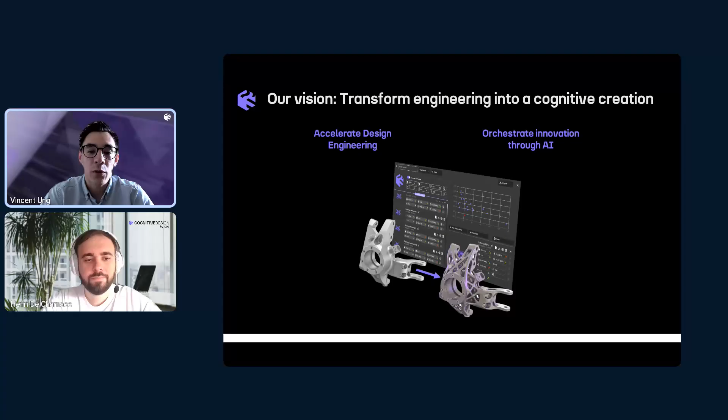When we look at the traditional engineering process, we go from manual concept creation to different stages such as simulation, manufacturability, business feasibility, to have actually an end product that is manufacturable. And we find that very often this process can be iterative, where simulation goes back to CAD, to manufacturability study, and so forth. And when you work with large companies, typically you have also technological silos, and this makes the process not so agile.

So the idea behind CDS is to really shrink this product development, make it a lot more efficient, introducing automatization and different sets of algorithms that will help you design and explore design more effectively. So instead of doing that manually, we have a different set of optimization tools that will help explore variants of design. And so you can make trade-offs and find the best solution for your needs.

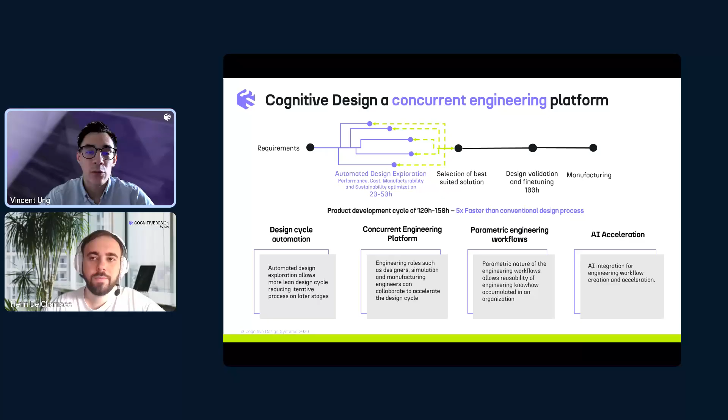So the idea is to reduce the product development cycle up to 5 times compared to conventional CAD design tools. And a lot of it has to do with the automatization that we'll go through together. And also the different tools that we have developed that we'll see in the demo, such as generative design, parametric design, optimizations, and also workflows that help us create streams of design changes that can be replayed anytime. And on top of that, we have developed AI capabilities to automate even more these design phases. Let's dive into our key technological enablers with Henri.

Yes, so there are 3 pillars that support the platform. The first one being implicit modeling. So we have our own geometrical engine that was developed at CDS. That is a hybrid modeling engine combining the power of implicit with the reliability of CAD and meshes. So a lot of our operations are based on this, and this allows to have a really robust automation.

Second one is parametric design. So you will see after, because it's a computational design platform with blocks that you connect, every workflow that you will make will be reusable. So it's really interesting. If you want to make a variation of a part, you don't have to redo everything from scratch. You can just change some parameters, redo it again. And it's also usable for other parts too. Like if you have similar use cases, you can just keep your workflows that you took in one project, reuse it after. So really handy.

And the third one is the AI-driven analytics. So we have a lot of tools to do analysis. So you can characterize your design, calculate some KPIs to have the performance, the cost, carbon footprint, and the manufacturability. So every design that you will make, you will see after, will have a scorecard with all of these scores.

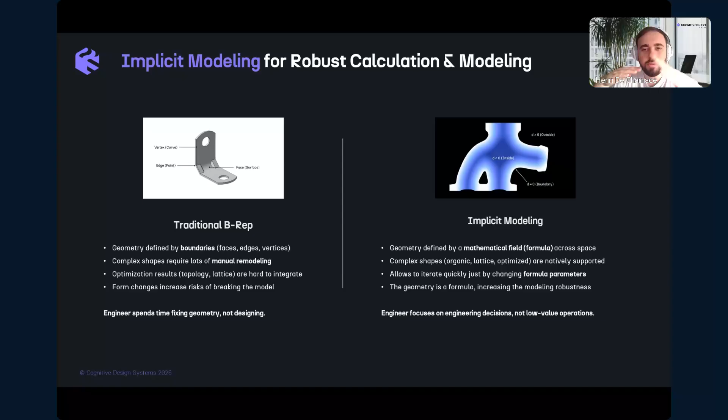On the contrary, implicit modeling, it's the full volume that you track. So it allows the operation to be really robust. You won't really have any problems. For example, if you put a fillet, if it goes a bit too far, usually you would have some topology errors on CAD. But here we don't have them. So it's really good for automation.

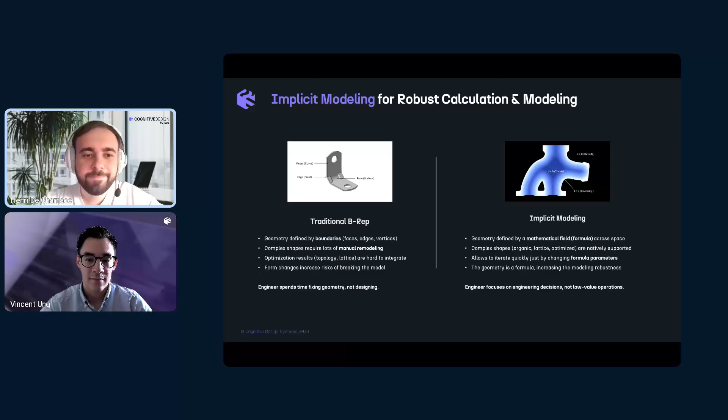Should we dive into seeing that in real? Yeah, sure. I will share my screen. Okay. All right. So yeah, before we deep dive into the whole demo, I will just show you how the platform operates. It's really simple, actually.

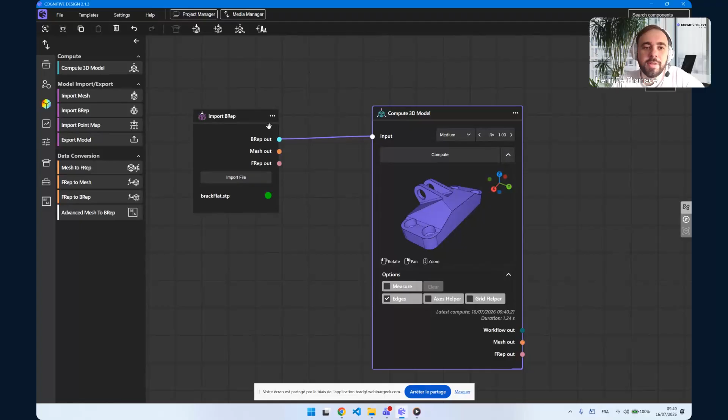So you have these blocks that you can connect together like this. And you put your requirements to do some operations. So here, for example, let me just import a simple bracket, like this one. I can just click compute here, and I can have a visualization of my bracket. So here you can see it's a CAD model. And for example, if I want to make it lighter for additive manufacturing and add lattices inside, I can just use here that lightweighting block.

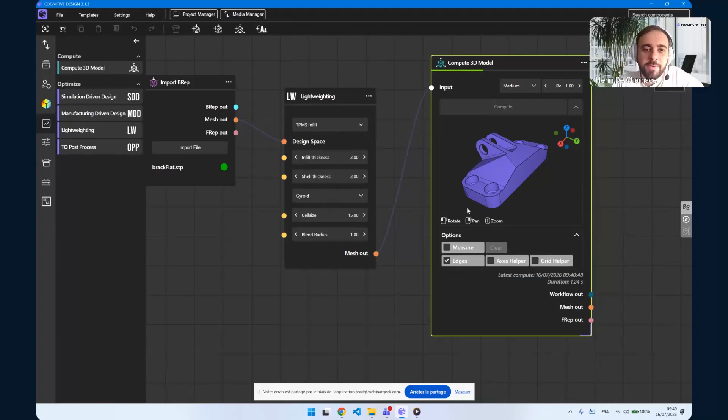So I connect my part to the lightweighting block, I connect it to the compute block, and then I can just run the calculation. And here, these are the requirements that I can put. So by default, for example, it's using surface lattices. So you will see them here, what is calculated. And I have a thickness of 2 millimeters. The shell also has a thickness of 2 millimeters. Here, you can see if I cut the part, you can see these lattices inside.

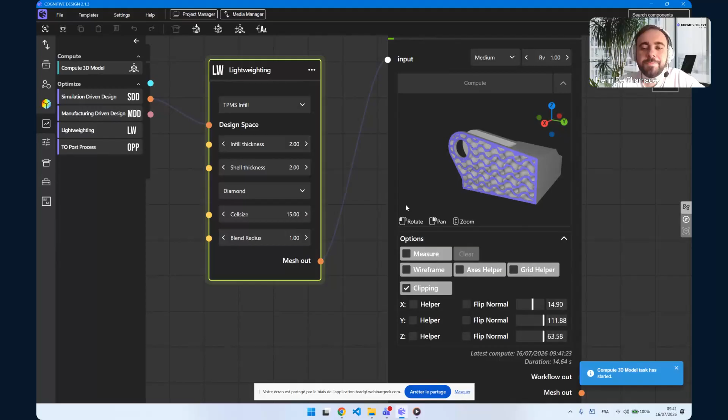And I can just change these requirements to have a different variation. So for example, if I wanted a different pattern of lattices, I can just switch it here, then recompute. And then my geometry will update, and I will have the new model with the other lattices inside. So fairly easy, and a lot of the operations that we have are kind of monolithic like this. So you have a single block that you can use and put all of your requirements inside in order to optimize your part. So here you see you have a different pattern.

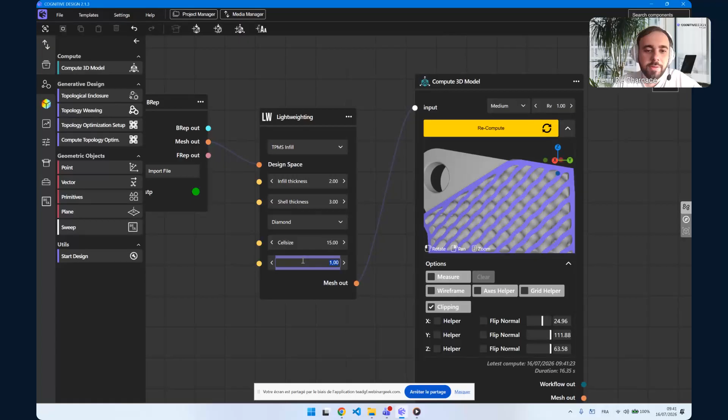I can also, for example, make the shell a little bit bigger. So the shell will be that thickness here. I can also put, for example, some radius between the lattices and the shell.

And just run it again. Fairly easy. And if I have a different part, I can just use that same workflow. I just need to change the input here and run the calculation again.

So quite straightforward. Here you can see my shell is a little bit bigger, and I have a radius here. This is thanks to implicit modeling, actually, because it's fairly hard to do in CAD. At the intersection of the lattices and the shell, you can see that we can put some radius automatically, which is really nice if you are into 3D printing, because it removes the risk of having cracks, for example.

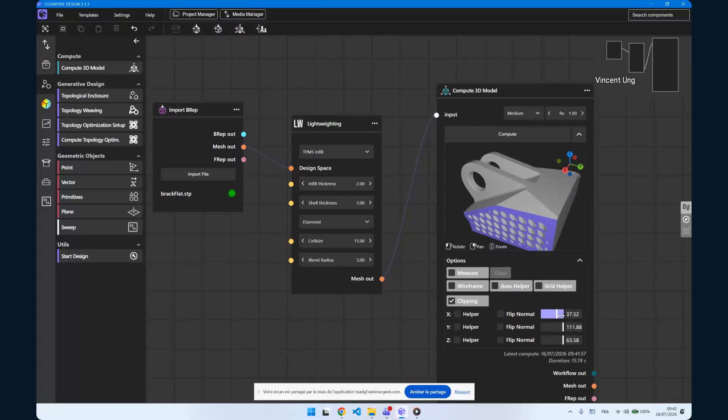Yeah, so quick intro on cognitive design. I will let Vincent finish the presentation, and then we can go back to show you more advanced workflows. Sure, let's do that.

All right, back to the presentation. So CDS and cognitive design is not just a software for lattices or implicit modeling. It goes even more than that. So what we will see together is the generative design capabilities.

And we often use that to perform design generation, where we'll create different variants so we can compare them. So instead of generating or drawing manually one design, we'll maybe generate 50 and see those trade-offs. And so to compare that, we need a tool.

It's something that we call design exploration, which is a multidisciplinary exploration that helps us compare designs between them. For example, is this one heavier than this one? Is this one more stiff in terms of stress? Is this one more manufacturable? Is this one more costly? You see all those KPIs as part of the design exploration, which helps you track the differences and the variants.

And at the end, the workflow automation helps you trigger those combinations of generative design exploration to go even faster. So really, the idea is to capture the design intent, as Henri mentioned, to really automate what you want to do when you optimize a design for different purposes.

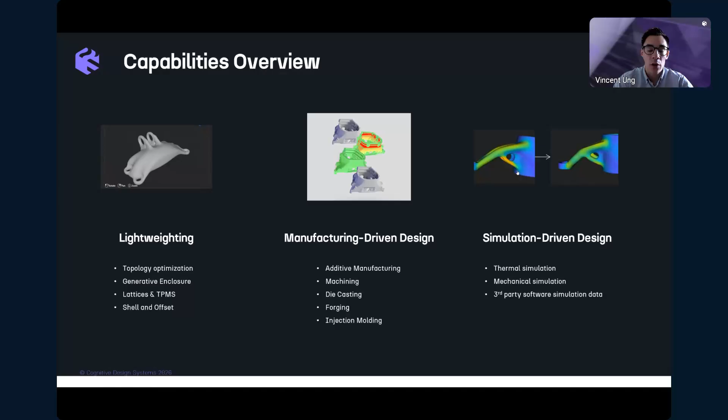What we have seen together is capabilities such as lightweighting. For example, if you focus on additive manufacturing, you can easily put lattice or TPMS, but you have all those other strategies such as topology optimization. We have also developed our own algorithms such as topology weaving that helps you lighten a part.

But we also have different capabilities that are more on the manufacturing aspect. So the second one is called manufacturing-driven design. It's a block that helps you improve your part for different manufacturing methods. We cover 5 different methods today: additive manufacturing, machining, die casting, forging, and injection molding. And the software will help you implement design-for-manufacturing rules automatically. We will see that together in the demo.

And last but not least, we have also a meshless solver. So we perform simulation-driven design that combines with implicit design. The beauty of that is that you can use the result of a traditional FE analysis or a solver to drive the modification of your parts. Typically, in this example, you can thicken locally the part based on the stress that you have obtained. And today we cover 3 types of simulation: thermal, mechanical, obviously, and thermomechanical, which is the combination of the two.

We can also accept third-party simulation data. So if you use software such as ANSYS, Abaqus, or others, you can import the results back into the software to drive the geometry changes.

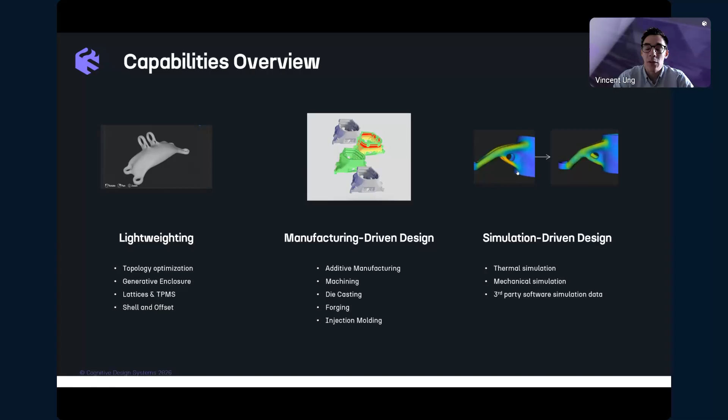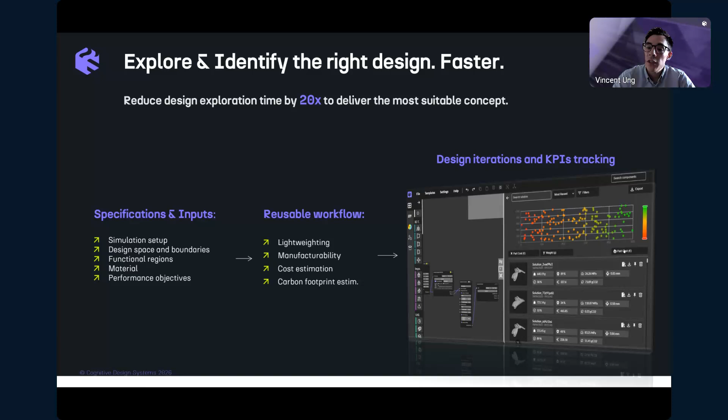Now, this is just a quick video, we will see that together. As I mentioned, we can use generative design to create a lot of different combinations, coupled with workflow to generate even more variants and structures, and compare them, apply filters, focus on parts that are above a certain manufacturability score, or compare a certain KPI such as the cost, the displacements, the weights, and so on.

And we'll see how we use that to perform engineering projects. Typically, when you want to do a new concept, sometimes you're not sure about the material, so you can play on different materials, on different manufacturing methods, for example, 3D printing versus conventional manufacturing, and so forth and so on.

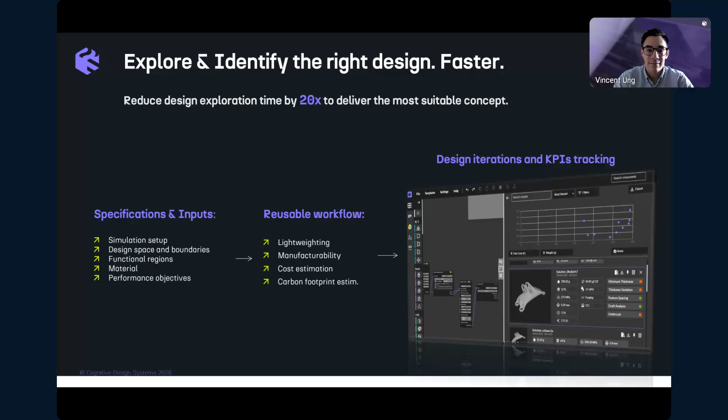I'll give it back to you, Henri, for the live demo. Yes. All right.

Okay, so let's go back to cognitive design. So I will show you how it typically goes if you want to optimize parts, especially to do topology optimization. So of course you can start from scratch and put the blocks yourself, but I would say 80% of our users just use the templates that we have here.

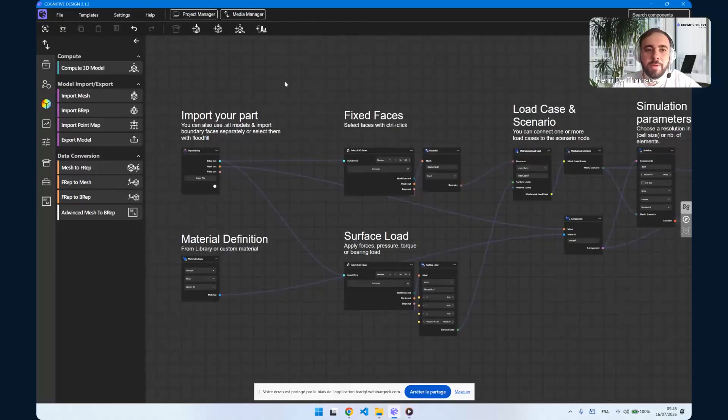So for example, we have this really handy one, which is called single body topology optimization. And you have everything that is already connected to do both topology optimization, manufacturing-driven design, and also track everything with the design exploration tool. So if we fly over the workflow very quick, here you have all the preparation steps where you can import your parts, select your material here, aluminum.

Here you have your surface selection blocks in order to put some load cases on your part. So we will see just after that we are able to fix some zones, apply some forces on other zones, etc. Here you have all the simulation setup that we don't really have to touch. It's already set, but we can change it, of course.

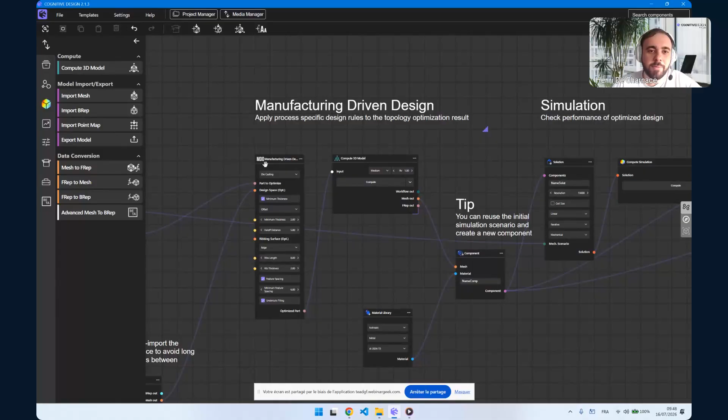Here we have the topology optimization, where we will be able to choose a target, for example, reduce 50% of weight. After this, we will have the manufacturing-driven design, where we adapt the result for the manufacturing process that we want to use. And at the end, we have some validation step where you can recalculate the performance of the part using simulation and calculate other KPIs such as cost, manufacturability, carbon footprint.

So everything that you really have to set up is the simulation setup. Other than this, it's pretty straightforward. So here, let's just keep for this part, the base setup. So I have one restraint and one surface load.

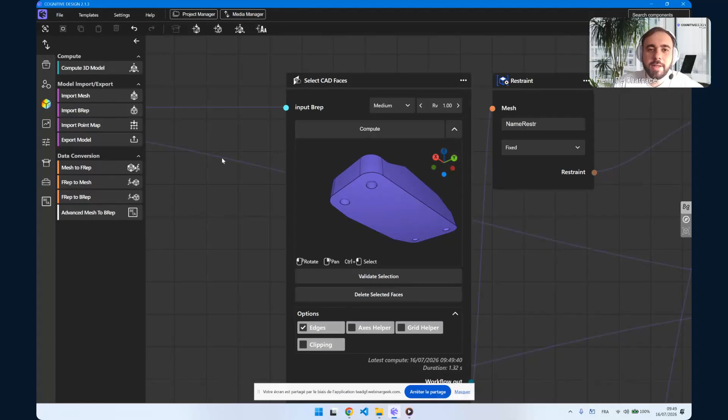So you can select directly surfaces in cognitive design using that select CAD face block. So here I can just select the faces that I want to fix. I can fix, for example, the 4 bottom holes like this. On the bottom here, I will select the faces where I want to put a load. Let's say the 2 holes on the top here.

And then, because everything is already connected, I can just run topology optimization, so I can have a first version of my part. So here I just use the base parameters. So the ones that you really want to change, I would say, would be the volume fraction and the max iteration. These are the two most important ones.

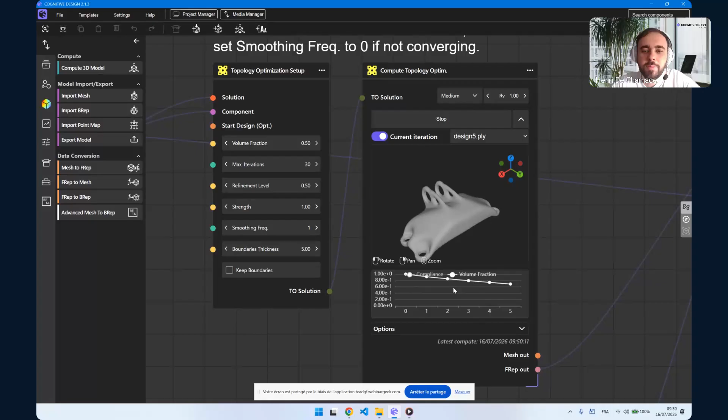This one is the target of weight that you want to have. So here we are aiming for a 50% weight reduction. Max iteration is like the maximum number of steps that you allow the optimization to do. So some people, they just put a really big number and then they stop when they feel the result is right. So you have a graph here where you can track the evolution of the weight, for example. And if you see that it becomes flat and that it's stagnating, then you can stop. But otherwise, the software will do it for you.

So here we can see little by little that it's reducing the weight of the part. So all of this is using the meshless simulation engine that we integrated. As you can see, it's quite quick. We can have in minutes a topology optimized part.

And then if you play on resolution, or if you have a really big part, like a turbojet engine, then it will maybe take 1 hour. But yeah, most of the parts, you would have them in a few minutes, 10 minutes max.

So here we can see that we are already converging to a solution. It's looking pretty good. I will just leave the calculation to run a little bit longer so it can distribute the material in a better way. You can see that it's still a bit moving the surface. So it only puts material where it's needed.

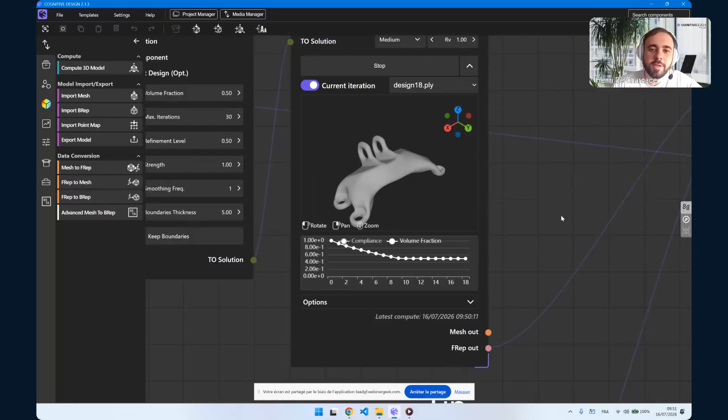So what it does in the background is it tries to aim for 50% weight reduction, but by having the highest stiffness, according to my load case. That's why here it's still changing the surface, because it can see that it can have a higher stiffness by still optimizing the geometry a little bit more.

And after this, what we can do is post-processing of that shape to make it fit to a specific process. So for example, here, right away on the right, I have it set up for die casting, but we will see together after that we can change the process and make designs fit for different processes. Let's keep die casting for now.

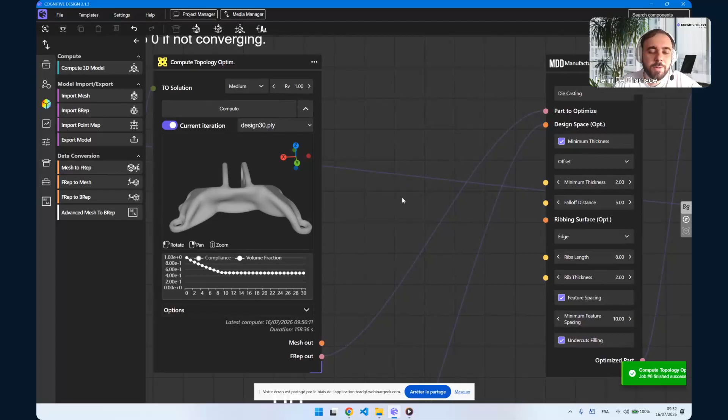So my part here, looks like the optimization is finished. So I have something like this, which is the best material reduction for that specific load case. I can see that if I wanted to make this in die casting, here I have a little bit of undercuts. So maybe we want to fix this. We can do this with that function here, manufacturing driven design.

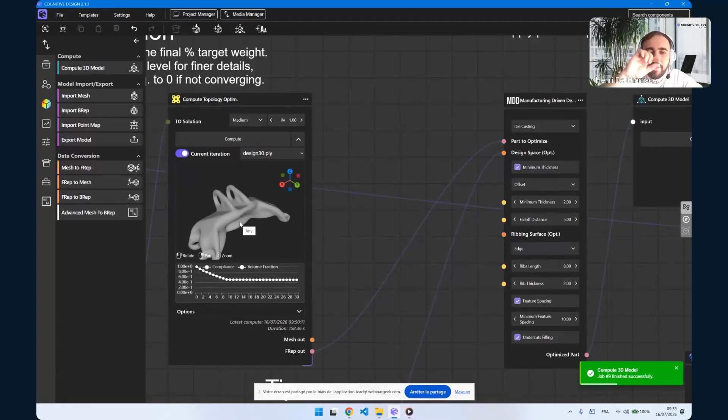So fairly easy. For each process, you have a set of rules here that are basically the design rules for that specific process. So here, for example, we have the minimum thickness, and we can set up a value here. Sometimes here it's not the case, but sometimes you can have thin sections on your optimized results.

So you can say, okay, I want everything to be above 2 millimeters, so it will do the job for me. So here you can see I've checked undercut filling. So it corrected the undercuts that I had, made a straight surface. Instead of having a concavity here, it just corrected it and made it straight.

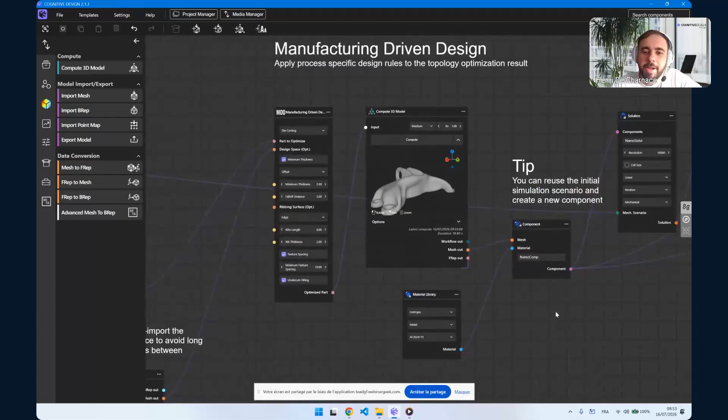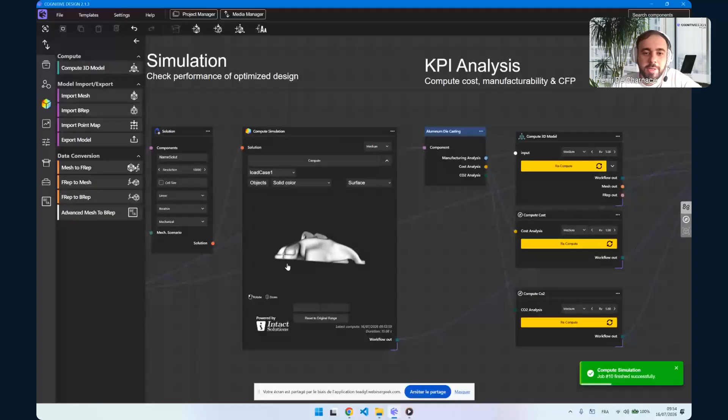And then once I'm happy with my part, I can just run the simulation to check whether I'm still meeting the requirements or not. So usually when you do a project, you have a maximum stress that is tied to the material. You maybe have a stiffness target too, some displacement value that you don't want to be above. So here, again, meshless simulation, so it's fairly quick, and I have the stress values for my part and the displacement.

Can calculate also the other KPIs. So here we have manufacturability, cost, and carbon footprint. So I just let them run.

And for manufacturability, you can optionally go have a look at how it is. So for example, here, I can see that everything is green, so the thickness of 2 millimeters that I've set is validated. Or I can look at the draft analysis, and I can see what's the core, what's the cavity, and what zones would I need to put some draft angles.

You can do it in the software. Here I didn't do it because it can take a bit long. But you basically see the idea, right?

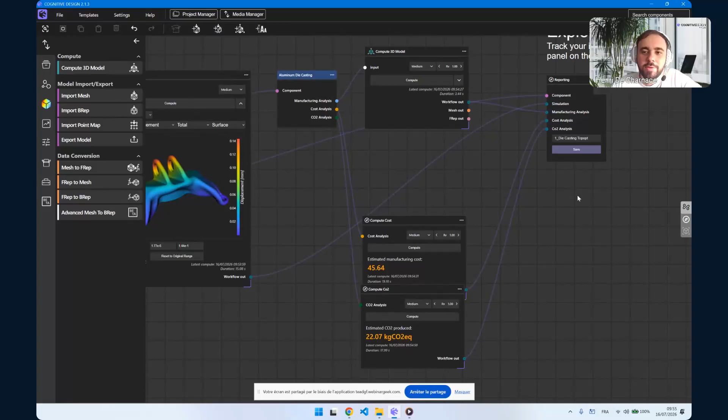And then I can just send this to the Design Explorer on the right. So here, if I just save it, then it will appear here in my list of design iterations. And here you see that I have all the KPIs. So I have the weight. This is the safety factor, so the maximum stress is 3 times lower than the yield strength of the material. I have the displacement also, etc.

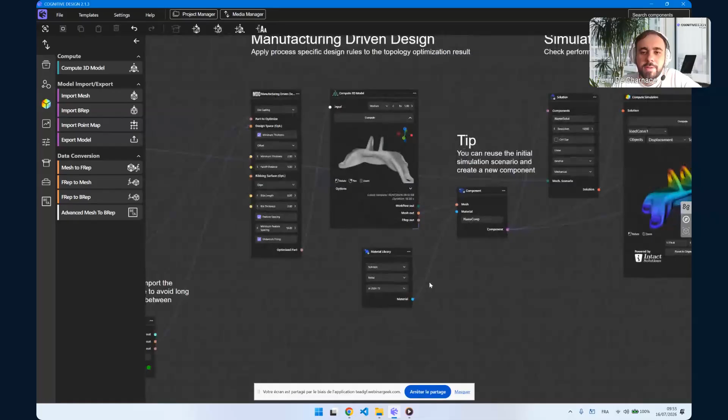So if I wanted to make this a bit more meaningful, I would need to compare it with something, right? So what we can do is just put the design space as a reference. So here I have my design space that I've imported. I can just rerun the KPI calculation on the design space directly, and we'll add it to the Design Explorer.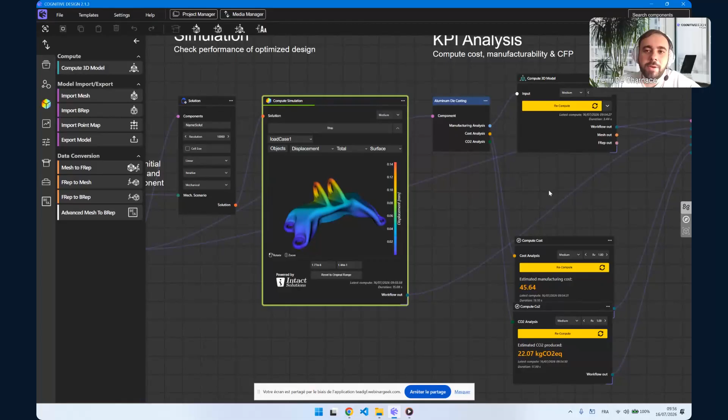So here first I do the simulation, and then I will run the manufacturability and cost analysis. And that will allow us to have a comparison point in the Design Explorer. So here, let's call this reference. Let's just wait that everything is calculated.

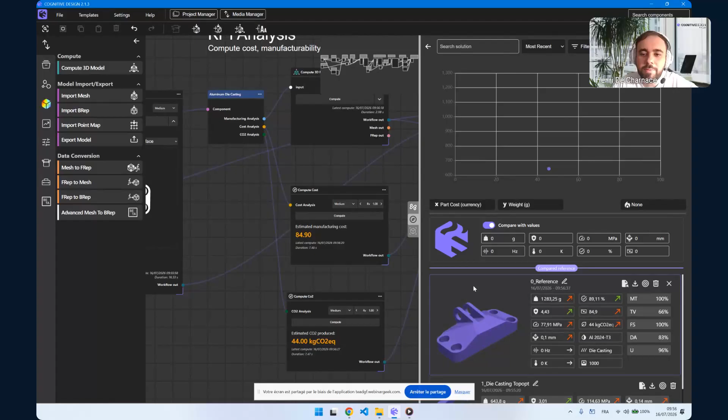All right, then I can just send it. And here you will see that I have a new point in the graph and a new part here, reference. And here, what I can already do is pin this design to say, okay, this is my comparison point, and you will see how it changed.

So we reduced the weight by half here, went from 1.2 kilos to 600 grams, but the stress is a little bit higher. So before we had the safety factor of 4.4, now we have 3, which is still acceptable. Manufacturability is a bit higher, and the cost is lower also, which is nice. We reduce the cost by half.

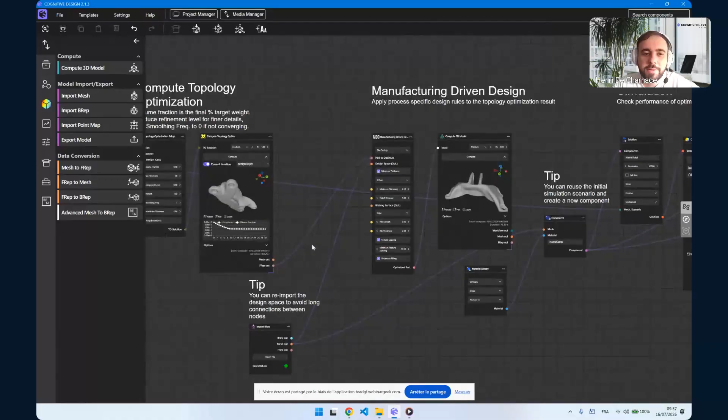And everything is parametric, right? So if I wanted to do a different iteration, I could just do it. So for example, let's say I want my part to be in machining. So I can just change to machining here, right?

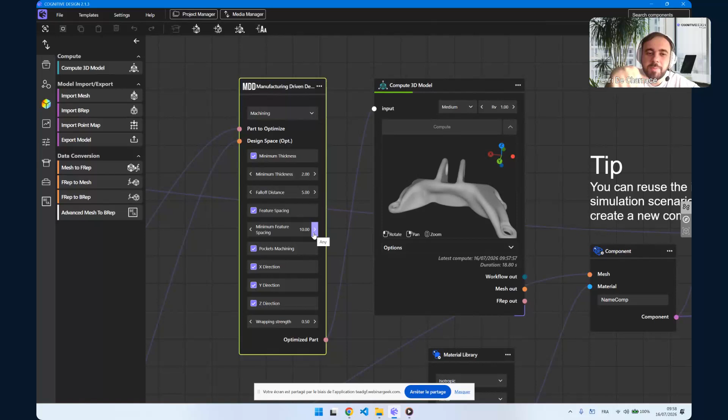And here you can see also some parameters that you can use for machining. So you can choose, for example, the axis where you want to machine, so here it's 3 axes. You can choose also, as always, the minimum thickness. Minimum feature spacing is also nice, it's to remove small cavities. So if you have a really thin pocket, it might be expensive to machine, so you can remove them.

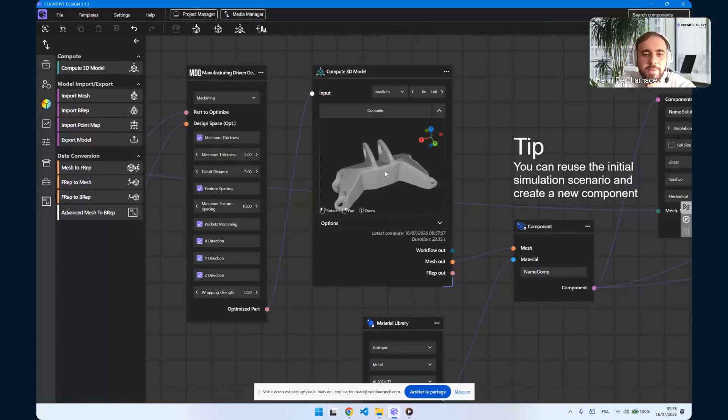And so here I can just redo the calculation, and I will see my new parts for machining. And here you can see when we apply this for machining, it's way more prismatic. So here it's in 3-axis mode. It's a bit bulkier, but it has a lot of flat surfaces that would be cheaper to machine. And then I can just rerun these KPIs, run the simulation.

And here I will just stop here to show you something.

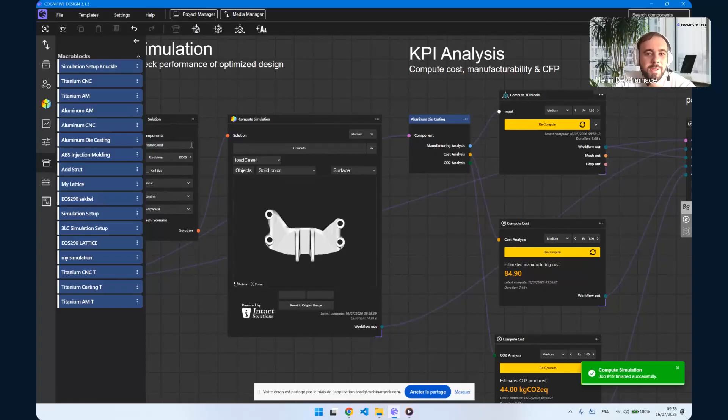So maybe one of the questions, I can't see them, but maybe one of them is how do you calculate the cost, how to calculate the carbon footprint, etc. So we do it through what we call macro blocks. It's basically templates that you can use to store some values. So here it's a template for die casting.

Obviously we might want to do the machining one, right? So I have that CNC one here. And if we have a peek inside, you can see all the values that are used for the KPI analysis. These ones, for example, are for cost calculation. You can set up quantity, hourly rate. For example, my machine here is 15 euros per hour. You can set up a material cost and also recurring and non-recurring costs.

Recurring is for every part that you make, so it will be times 1000. And non-recurring is for the whole batch. So with this, it's fairly easy to adapt it. For 3D printing, for example, you would put heat treatment as a non-recurring cost, but you can put sandblasting as a recurring cost. Here also, I have some process settings. For machining, you can set up the cutting speeds. And I have the same for CO2.

So here, I can just connect everything to my machining template and reconnect it again here. Tac, tac, tac. And with this, my analysis will run for machining this time. So I do this, I do this, I do this. Okay, so I have new costs. And then I can call this one, let's say 3, I've lost track of numbers, machining. Save it. And here I have yet another iteration.

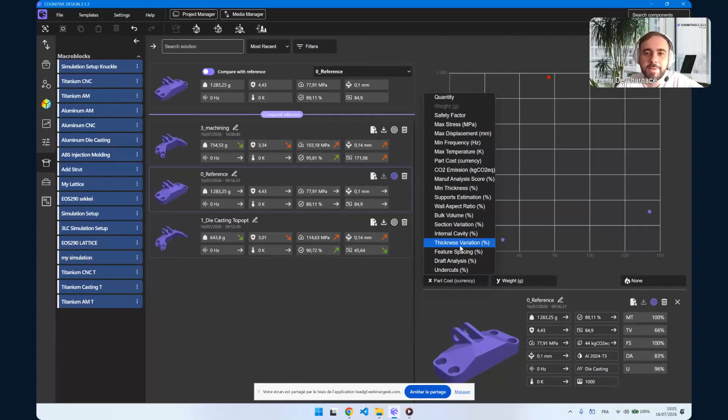If we look at the KPIs, we can see that the machining one is still lighter, not as light as the die-casting one, but it's safer. So if you want to prioritize a lower stress, this one would be a good choice because we have 10 megapascal less in the machining one. That's the kind of study you can make. You can do it through the graph also, if you have a lot of parts. You can set up anything, like the safety factor, and then see, okay, this part is the cheapest and has the lowest safety factor.

You can do it through filters also, useful if you have many parts. When you do DOEs, it becomes really handy to have these tools. So really straightforward, and you can iterate on anything. For example, if I wanted a different topology optimization result, I could say, let's target 40% weight reduction, rerun the optimization and add it to the Design Explorer. So you get the idea. Just in 15 minutes, I could already design three parts.

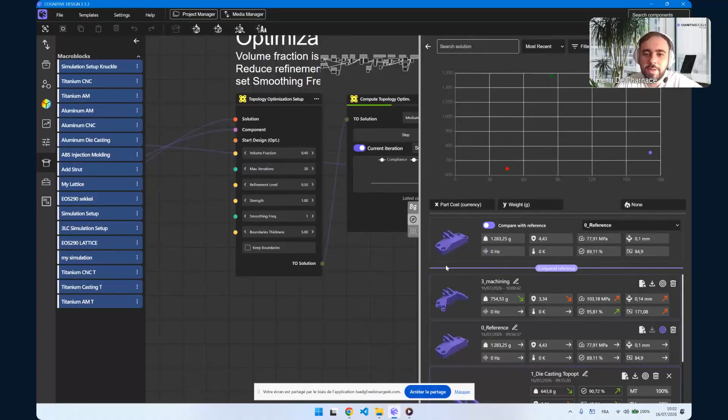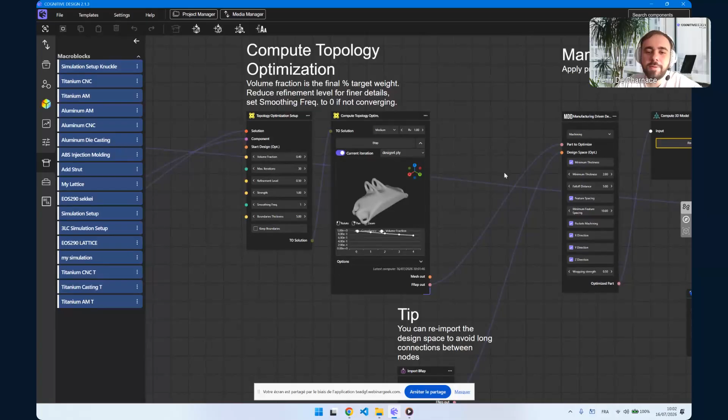And you can do way more, especially since soon we'll be adding the DOE feature, so you can automate all of this. You just say, try 10 designs, and then I will choose which one is the best. And here, really quick, I just change the volume fraction. Afterwards, if I wanted to add this to the Design Explorer, I would need to recalculate everything. One of the questions also is, can the changes propagate automatically? In that case, you can just recalculate the latest computes, so it will do everything for you in line.

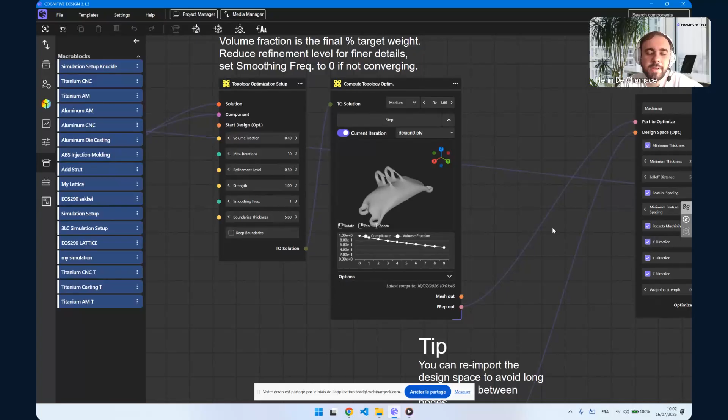We don't calculate things automatically because operations like this are pretty long, so you don't want to run it automatically if you change a parameter. And you can see here that we'll have a different variation that will target a little bit lower weight. It's targeting 40%, so the part will be a bit thinner. So fairly straightforward. And the beauty of this is, until now, I've been iterating on the same part, running calculations only for that part.

But usually what I can do is, okay, here I finished my project. Oh, by the way, you can export this as a report also. So I can create a PDF out of this and then go have a look at it. So here.

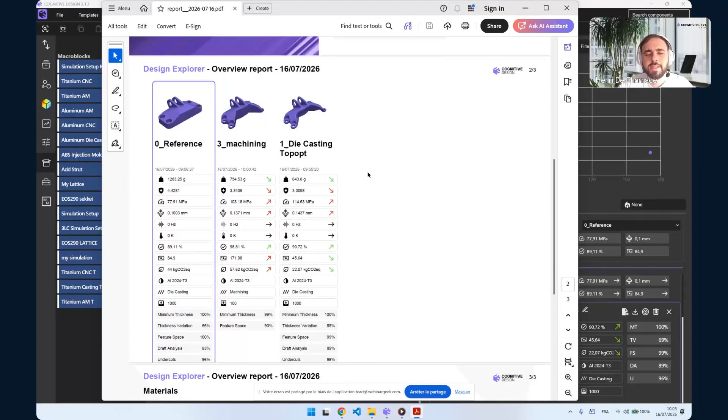So here you can see my report and all the results, like the filters that I've used and the KPIs, are stored in that report. You can have it as a CSV also if you want to do some post-processing on it or feed it to an LLM, right? So it can make your report for you. Here you have the material properties.

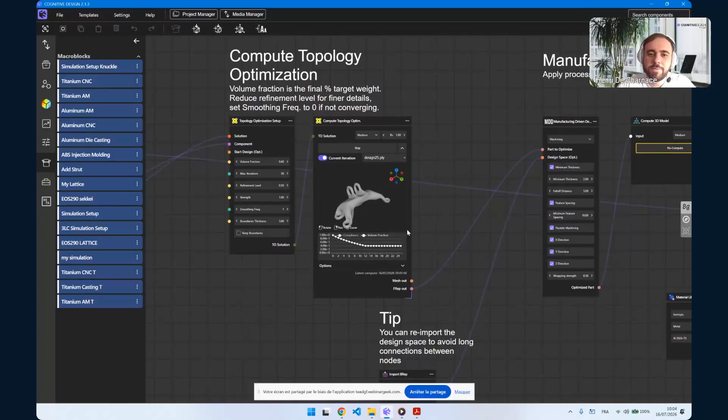Yeah, and here you can see, okay, I have a little bit thinner version of my part. It's nice, I like it. So yeah, this one too, I can just send it to the Design Explorer, right? Just like connect it to simulation and then rerun everything again. So I can just stop it here. Okay, let's say this is nice.

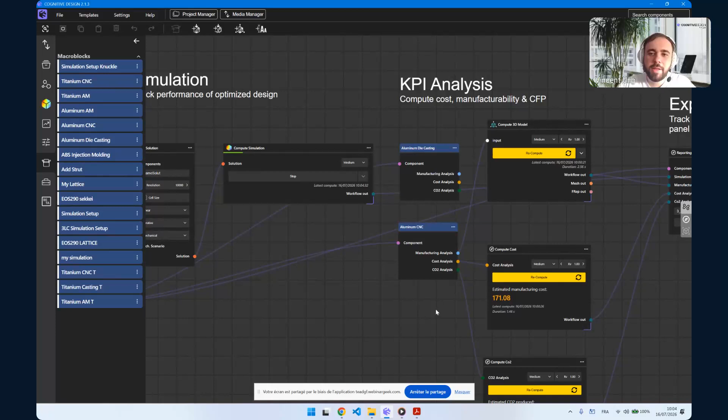So let's say I bypass the manufacturing driven design step. I like it as it is. And then I can just rerun the simulation and then rerun these 3 KPIs. And then I will have my part. Yeah, then run these 3. Let's say I have a really good 5-axis machine, so I can make this in machining. And then, yeah, I put it here, maybe 2, save. And here I have my new part.

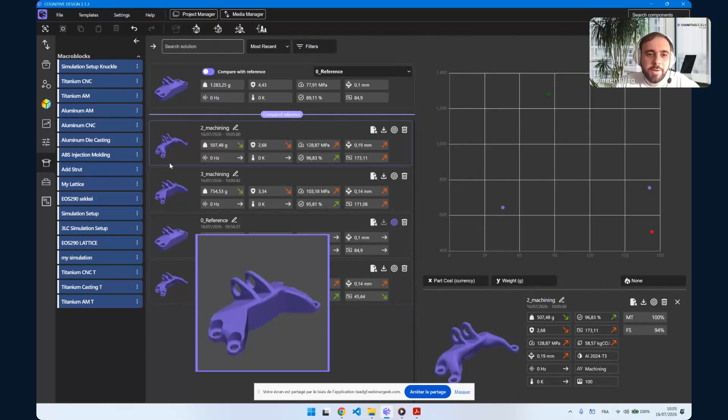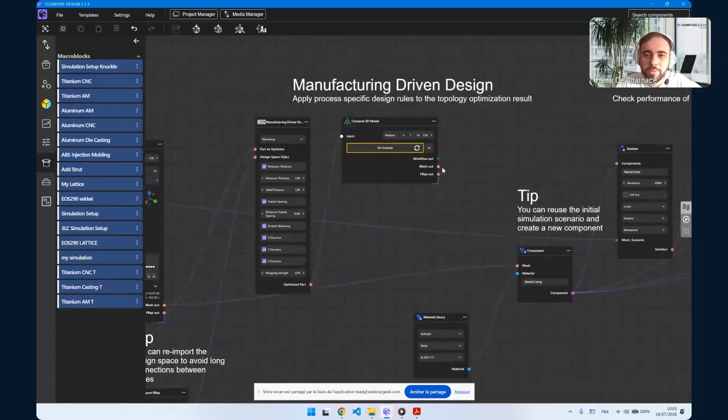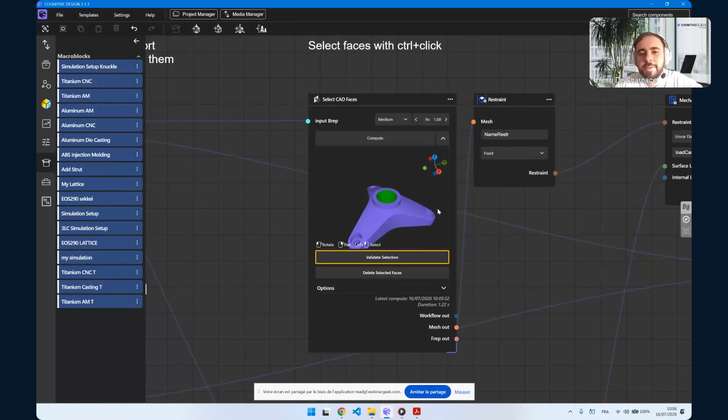And yeah, as I was saying before, if you want to do this for a different part, really simple. I can just go back to the beginning, import a different part. Let's take that one. So another bracket. So what most people do is they create a workflow per family of parts. So this one is fairly nice for brackets. You could have different workflows. If you have really thin parts where you can't really do topology optimization, then you can use some simulation-driven design to optimize the thickness of your part, and that can also be saved as a template.

And here, let's change stuff a bit. So usually you don't always use the same simulation setup, right? So of course I need to reselect the surfaces. So let's put a load on the 3 surfaces around. But okay, let's say this time it's not a force, it's a torque, for example. I can just set up the torque here. Let's say it's in the Z direction, and the value is 100 Newton meters, for example. All right. You can add more loads also. Here, you just need to connect them to the load cases. You can do several load cases also.

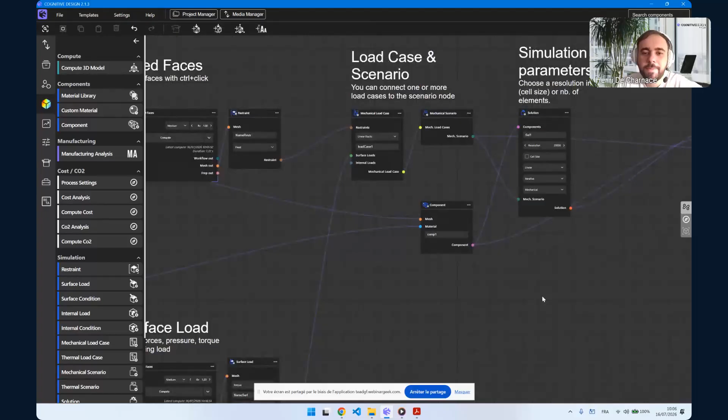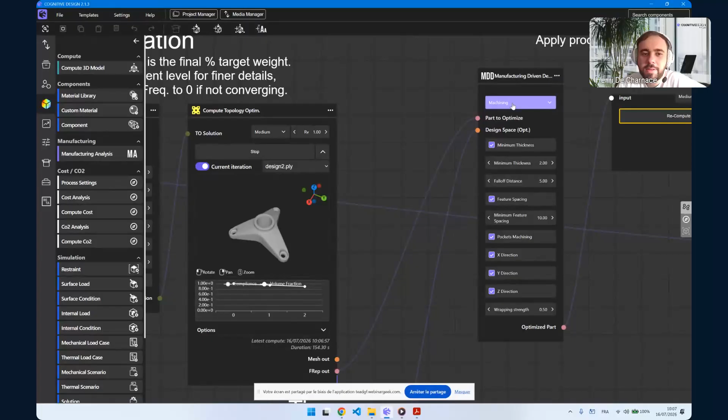And here I can just rerun the topology optimization. So, okay, let's target 50% weight reduction. Then I can just run it again. I don't need to connect everything back, right? Everything is already set up, so I can just start from my past project, and it will do the calculation. So here it will run again. I will then have my optimization for this part. And let's spice stuff up a bit. Let's say maybe I want this for, I don't know, forging. I can just leave the calculation be.

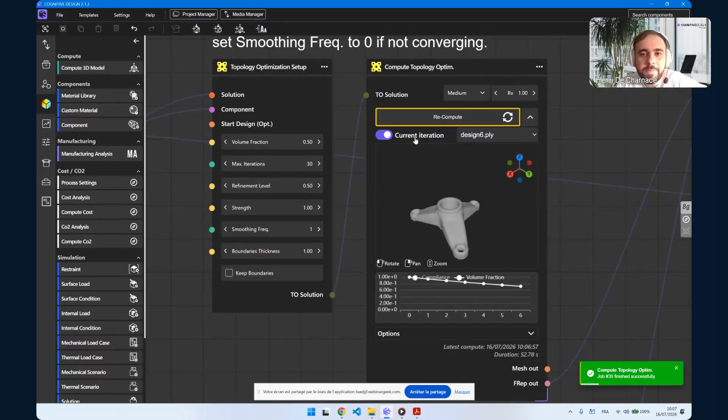So here also in the optimization, you can set up some thicknesses to protect. So here maybe it's a little bit too big, so I can change it here. So where you apply some loads and some forces, you can set up a boundary thickness here, and it will keep it. Before it was 5 millimeters, so you can see here that it kept 5 millimeters around the holes. Here I set it to 1, so I will have a thinner interface around that part. These kind of things you can also do in post-process.

So what I would advise is try to have the best theoretical part in topology optimization, and then during the post-process, you can add back material. Usually, you have fixed thicknesses for machining, for example, that you want to keep. So you can do this as post-process using Boolean operations, or we also have some blocks that can do both smoothing and putting back these regions on the part. And here you will see it's optimizing little by little.

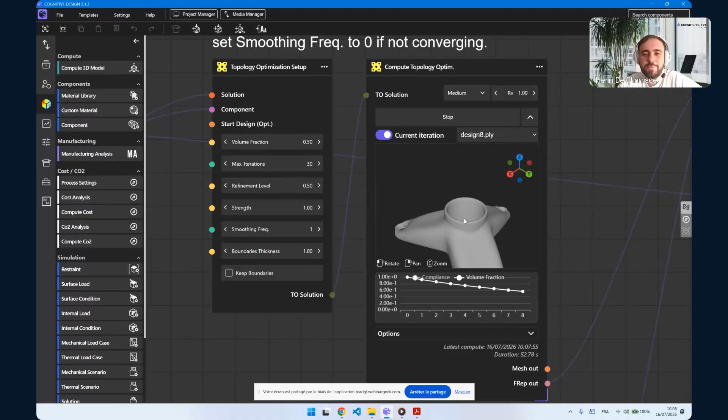And here I just reduced this on purpose to show you the thickness correction. So here you have a rather thin zone, right? So using that MDD block here, you will see after that I will be able to correct this in order to fit the process parameter. So here, for example, if I say I want 2 millimeters, then it will bring back 1 extra millimeter here. So just wait a little bit until it finishes. And then we can just run the manufacturing driven design.

Yeah, and while it's calculating, I can show you a bit the tabs on the left. So here you have all your import and conversion tools. So what we call FREP is the implicit model, it's function representation. BREP is CAD models, and mesh are like surface meshes like STLs.

Here you have some selection tools to select CAD faces, to select points, etc. You can move your part. You can also extract cylinders. This is pretty useful. If you don't want to select things manually, you can just get them automatically.

Here we have the generative design tab, where we have the methods that we have. So today I've showed you topology optimization, but we have two others, topology weaving and topological enclosure, that are used for different use cases. These are more like direct generative design approaches, which are still pretty nice.

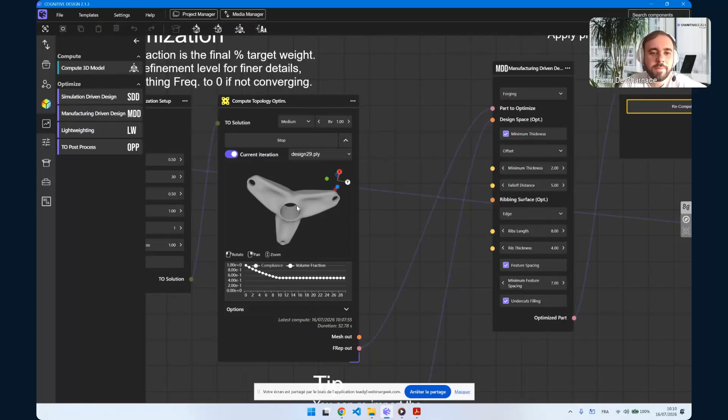Here you have all the simulation stuff. So for simulation, today I've showed you mechanical, but you can also do thermal and thermomechanical. You can combine them. And here the optimize tab, where you have manufacturing driven design and also simulation driven design, where you can tweak the parts using the simulation results.

So here the calculation is finished, so I can just run manufacturing driven design here for forging, and then it will post-process my part. Honestly, it's already pretty good, but at least it will correct this thickness here, and maybe add smoother angles. So that stuff you can do also.

Here it's set up to 7, so where you have sharp corners like this, you can smoothen them using that minimum feature spacing here, which is pretty useful actually. If I make it a lot higher, then I will have a more convex part, which sometimes can be pretty useful.

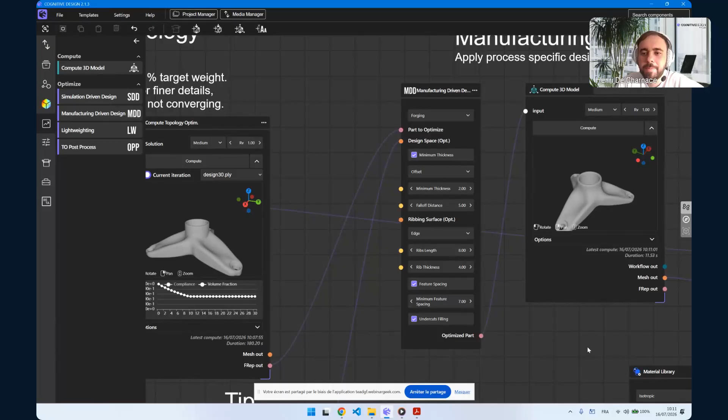And then I've showed you already quite a lot of times, so I won't show it to you again. But you can run the simulation and send this to the expert to iterate. So that's everything from my side. I believe there might be some questions.

Yes, indeed. Actually, quite a lot of questions. So maybe what we can do is go through them one by one and make sure that we have answered them correctly. Yeah. I think there was a question on manufacturing-driven design and how it works.

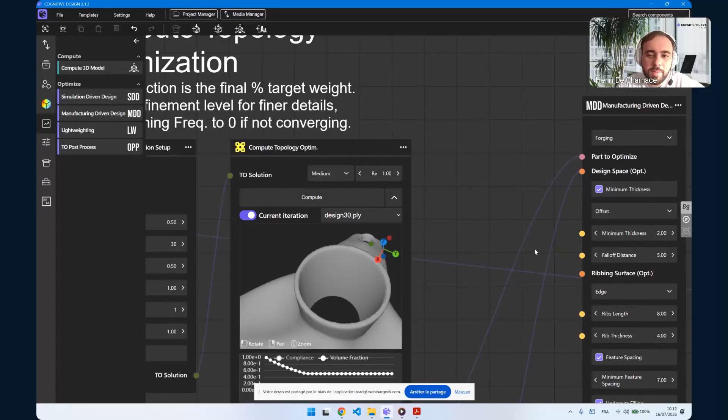So basically what you were seeing just before with the manufacturing analysis, where we detect some zones in color that might be too thin, it's using these values, and each rule is something that we modify. So for example, thickness, it will look locally at the thickness of the part and add some material where we need it. So here you could see that before it was 1 millimeter, but here it went back to 2 millimeters. So it's this kind of operation directly using implicit modeling.

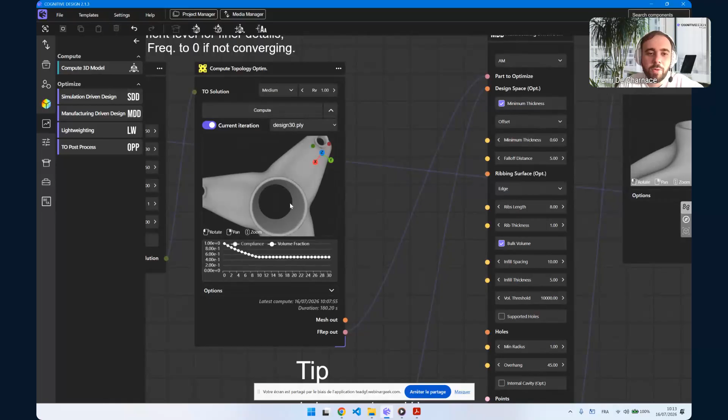And the operations depend on the process. So for forging or for die casting, you want to remove undercuts. So we look at zones that might have undercuts and fill them, project them. For additive manufacturing also, we have quite a lot of corrections that we can do. For example, if you have holes in overhang, you can change them to diamond to have no supports. You can put some ribbing. Quite a lot of things that you can do.

But under the hood, it's using implicit modeling operations. And so it's not using process simulation. It's really looking at the geometry of the part and making sure that it follows the geometrical rules of the process, the design rules.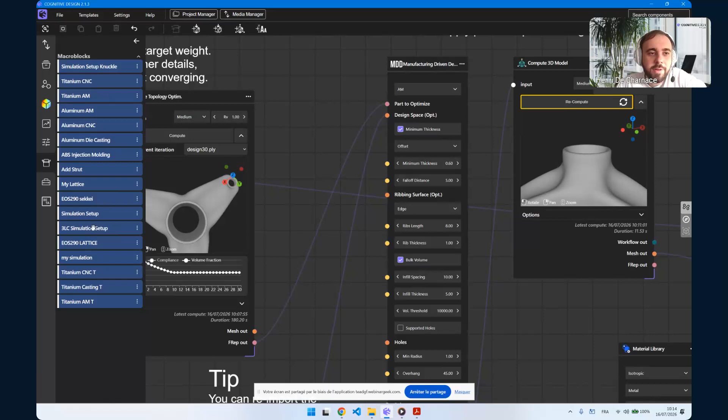And for manufacturing design, as Vincent said, mostly rule-based, but you can save everything as a macro block here. So you can make your own little database in order to reuse it later. We are looking to add more processes, but so far we have those 5, and we want to add as many as possible to cover more manufacturing methods.

There was another question on having other load cases, or more than one. And yes, effectively, you can plug and add new load cases that are different. You can add mechanical or thermal stresses. And we have another module that helps you upload, let's say, hundreds of load cases when you have very heavy stressed parts.

Exactly, yeah. Because most of the projects that we do, of course, we have like 20 or 30 load cases. So you can set them up inside the software. We will soon add also the capability, around September, to import an Excel file. So if you don't want to set up the load cases in the software, you will be able to just import your Excel in the right format and then do it.

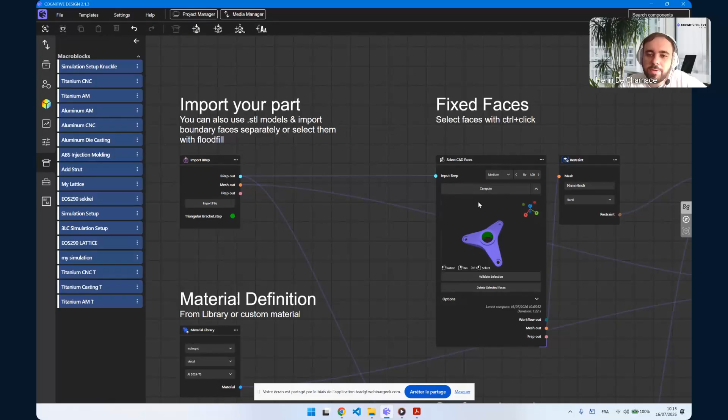Yeah, nice question from Didier. So yeah, you can also start from just functional zones. There are several ways you can go around this. You can create basically a design space with the functional regions using an operation that we call shrink wrap. So let's try this on that part really quickly so you can have an idea.

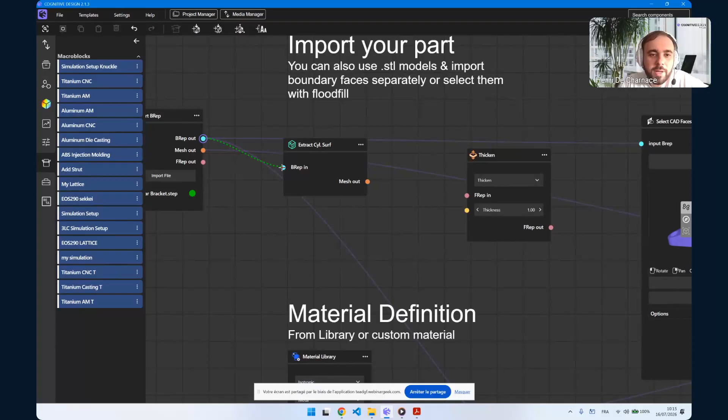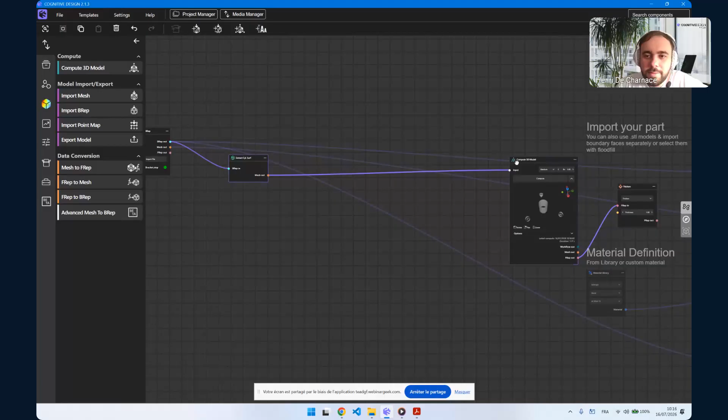All right. It's not a case that we encounter often, so we don't have a template for this, but it might definitely be interesting to add a template for this. So how you will typically do it is either you import your CAD regions like this, or you select them in the software. Then you can thicken it. But let me just make some space. All right. Yeah, so you can thicken them.

So let's say, for example, I want to keep maybe 3 millimeters around them, like this. Okay, so I have a thickened version of my interfaces. And then you can use that shrink wrap function. So this one, basically, will try to connect all of these together and try to make a volume around them.

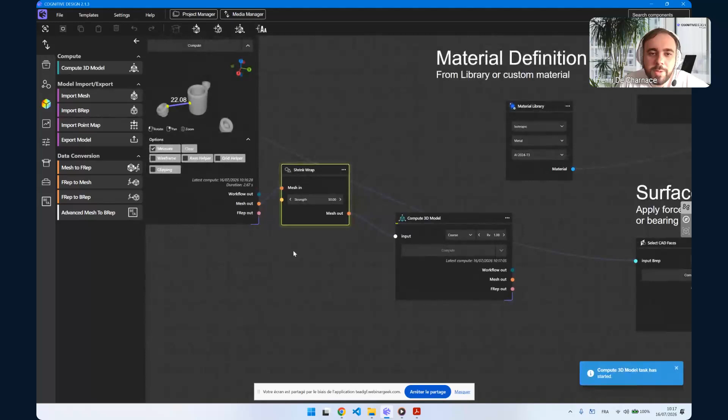So you have tools to measure inside the software. Here I have around 20 millimeters. So I guess if I use a value of like 50, I should be safe enough. And then you will see the results here. I will just put coarse so it's a bit quicker. So it will create a volume around all of these. So you can have a rough shape, like a rough design space of your part.

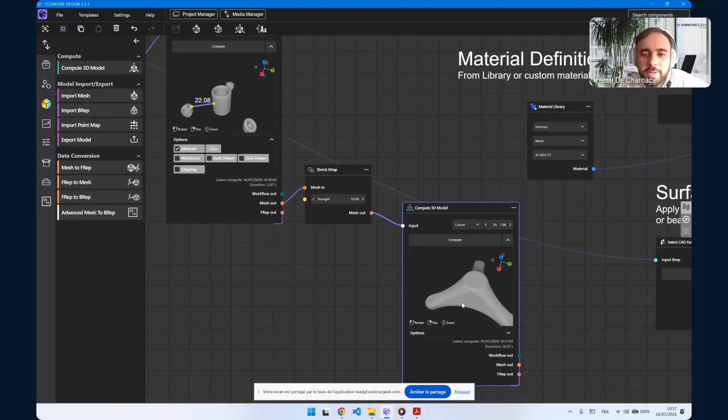And then what you would do from there is, you can create non-design regions inside the software, or you can just import them from CAD, right? So I could just import non-design regions to open back the holes. But here you see, I've just started from the functional interfaces. I didn't use the design space. I can have a nice starting point. It's really nice to do some fast prototyping, actually. Yeah. So I hope this answers your question.

Question from Marco: is there manufacturing optimization for different additive manufacturing technologies? So yes. The approach that we have is, globally, what are the rules of DfAM? And then you just adapt them depending on your machine, basically. So for example, I can have aluminum or titanium additive manufacturing, and it's powder bed, right? It's just the values that you put in there that would change. So you would put values for FDM or values for LPBF.

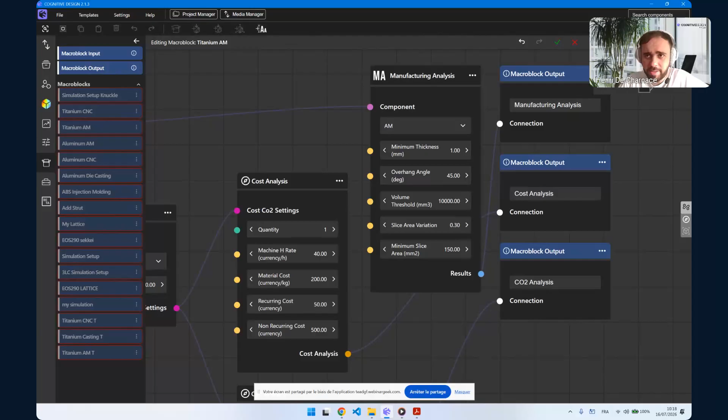For these processes, for example, the minimum thickness can change, the overhang angle can change. We also check for slice area variation if you don't want abrupt changes. So all of these you just set according to your process. We also have sets in manufacturing driven design that are specific to certain manufacturing processes in AM. For example, depowdering. We have a way to depowder parts. It's something that you will not have for, for example, FFF or filament-based 3D printing.

Yeah, two questions from Yves. So simulation right now is only linear static, but usually what most of our customers do is they do quick iterations inside the tool because, as you saw, it's really quick. I can just make a design in minutes, and then at the end we just export it either as a STEP model, so we can reconstruct the part as a STEP model, or as an FEA mesh. For this we use a partner. And then people just run the final validation in Abaqus or in ANSYS.

But at least most of the time that you spend trying different designs, you don't lose it. If you had to do one ANSYS or one Abaqus validation for each of these, it would take weeks, especially if it's not the same department. You need to send it to your colleague and then wait for the answer to come back. It's pretty long. So here you just explore the design, say, okay, I want this one, and then this one I can just send to simulation.

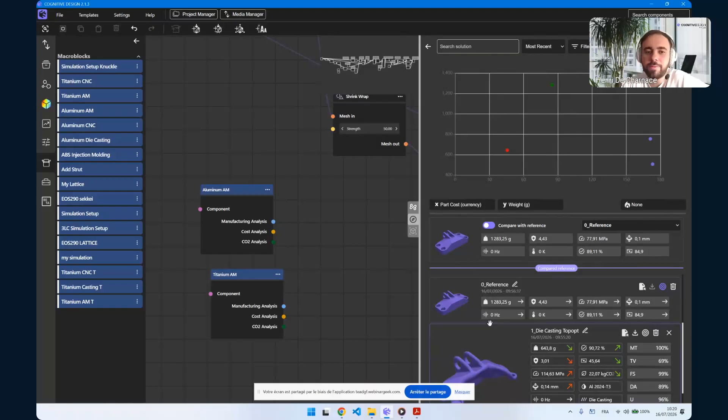And to be trained on the tool, as Vincent said, 1 or 2 days is enough. For topology optimization, maybe some of you might already know how to do it from what I've shown, right? It's fairly easy actually if you use the template. So as Vincent said, CFD is planned, using also our meshing partner VoxShell.

So, nice question from Didier. Topology optimization until now did only 40% of the work. You had a rough shape and you can't reuse it as it is. Now with cognitive design, we do 80% of the work. So at least you have a part that is pretty close to the final one.

However, the final steps, like making the drawing, putting the tolerances, etc., we leave to the CAD players. So you just export your part and then do the detailed design, the final fine tuning on your CAD platform. So we really place ourselves in the advanced concept phase.

Other questions. So all the calculations are on the PC. Nothing goes to the cloud. The software is fully on-premise. We don't even send logs. So you can use it safely offline.

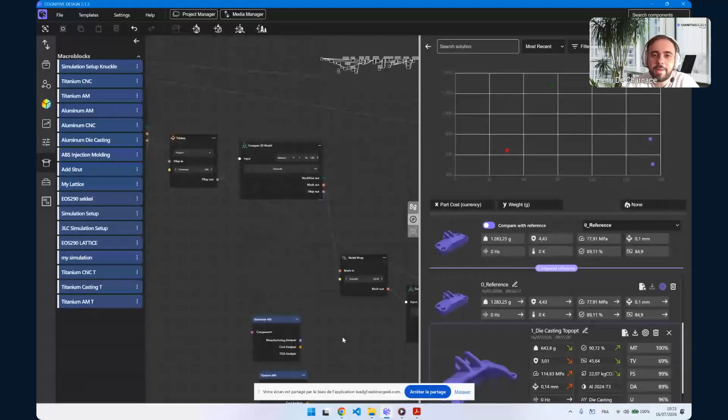Right now I'm using a laptop. It's just a gaming laptop with 32 gigabytes of RAM, and you can see that it's already enough to do this kind of topology optimization. If you have really big parts, let's say 1 or 2 meters, then we would advise to have at least 64 or 128 gigabytes of RAM, so the software doesn't freeze while it's calculating. But it's pretty efficient, so that's why we do everything on-premise.

Are there any other questions that you want to ask in the chat or live? I guess one last question from Marco: how do we output? I didn't show it, but we can export a part as a B-rep. It takes a few minutes, so I won't be able to show it right now, but I can show you one that is already calculated.

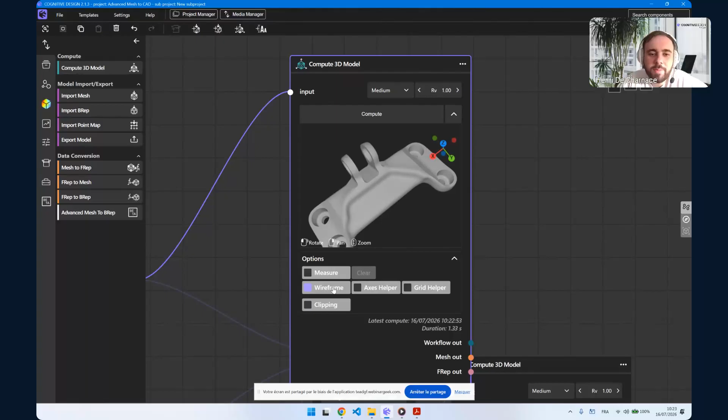The B-rep export that we have is hybrid. So here is a mesh, for example, and let's say I want to export this as a B-rep. As you can see, it's a mesh with triangles. So you have this block here, advanced mesh to B-rep, that we can use to convert that part to a CAD model. And how it works currently is all the zones that touch the design space will stay clean.

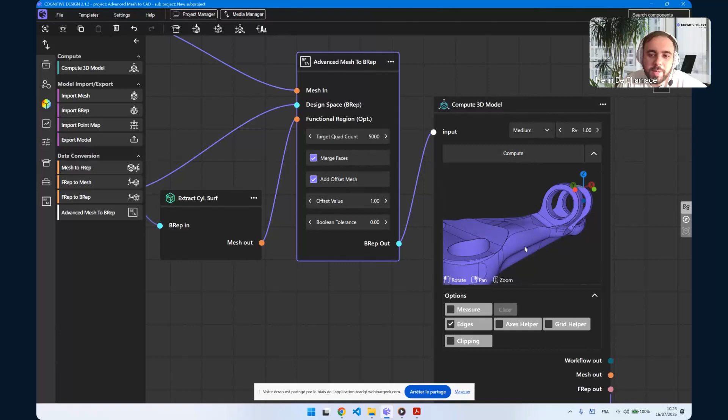So here you see I have clean cylinders, I have clean planes around the part, and all the optimized zones are organic patches like this, NURBS patches. And this is already really nice because what you get in most other generative design software is a fully organic part. Everything is patches, and if you wanted to do simulation on it, you wouldn't be able to select these cylinders. So that's the conversion method that we have now.

So that's what you get. You can easily still edit this, add some over-thicknesses, for example. I would say for die casting, maybe there is still a little way to go for drafting. It might be a bit tricky to put drafts on a part like this, so at the end of the day maybe you need to redesign it. But we've already done some projects in machining, for example in 5-axis, where we're able to use these geometries.

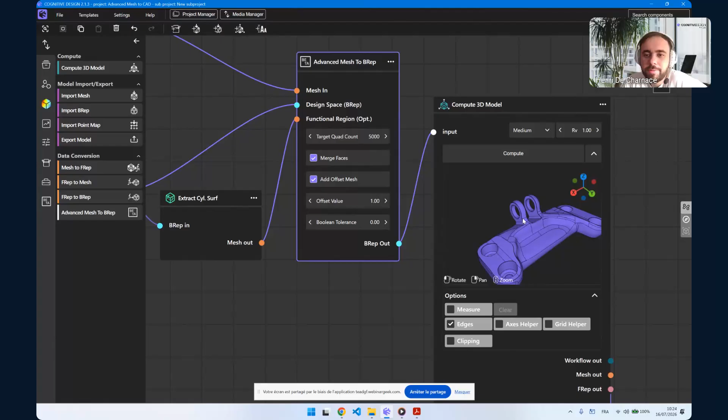It's something that we put quite a lot of effort on, this mesh to B-rep stuff, reverse engineering stuff, basically. So soon in the next version, you will also have a version for machining that gives you true straight faces, which will be more usable.

I think there's another question: can this functionality be used for reverse engineering? Yes, actually it's the same concept. So you can use this for reverse engineering. If you do it from a scan, we also have some tools to correct holes if you have some in there. So you can use that.